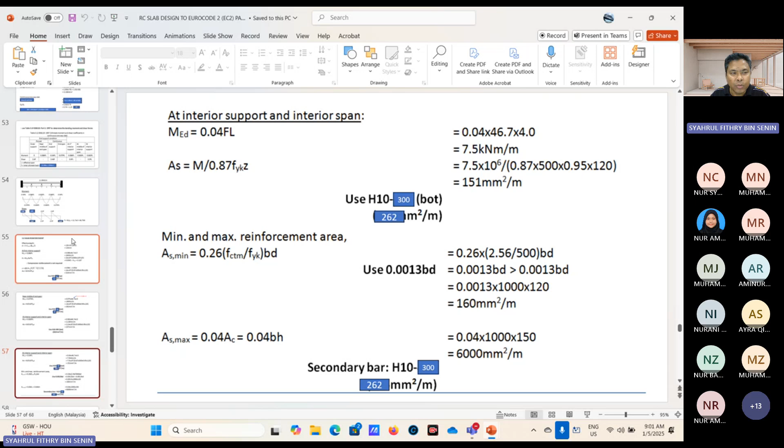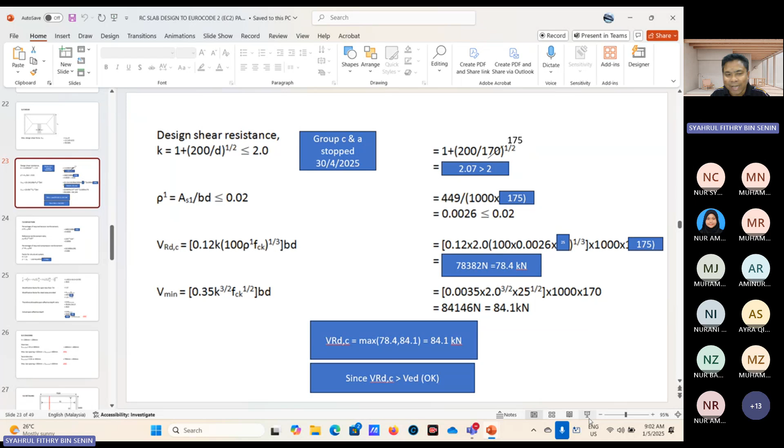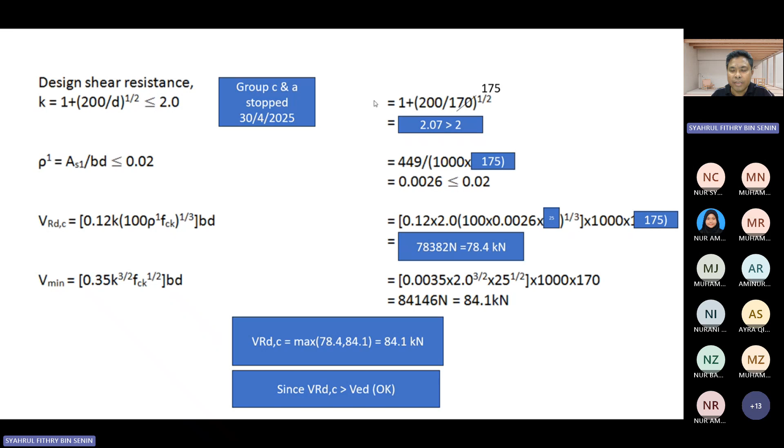Now, before we do our tutorial, we finish our lecture regarding the shear resistance check. We have done this shear resistance check in your classroom yesterday. Now we move on to another two checks, that should be done on the previous example yesterday, which is the deflection check. On the deflection check, you must compare your rho and your rho naught.

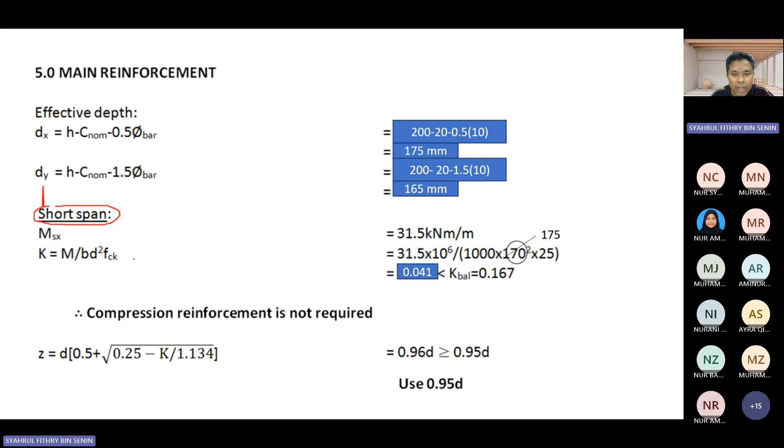So your rho is equal to the required area - and this area required is for what? Is for the maximum sagging moment. So you have to refer back to the section where you design sagging reinforcement. If we refer back to the sagging reinforcement, which is the short span, remember that short span has the highest bending moment.

So the required area for this part is 436. Kita lihat balik apa dia punya deflection. AS required here is 436. Okay, so di sini saya ada kesilapan, should be this one is also 436. So please change this one to be 436. Kenapa 436? Because required, not provided. So this answer also will be changed.

If I calculate that again, the correct answer will be - times 175, you'll get 0.0. So this one will be 0.00, we have double 0025. So almost similar, because the previous answer is 26, but this one is 25.

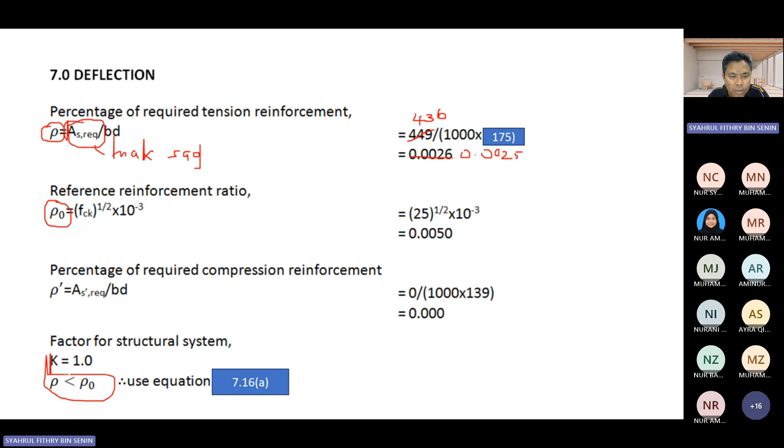So you found that your rho is less than rho naught. So you need to use equation 7.16a. And remember that our system here is - sekejap ya - so our system here is simply supported 2 slabs. Okay, simply supported 2 slab.

And from table 7.4n, kalau tak silap saya, K is equal to 1. You have to substitute to equation 7.16a, masukkan nilai yang sepatutnya, then you get L over D to be 38.8. And since your span is less than 7 meter, your MF1 is equal to 1. Because your span - how much is your span?

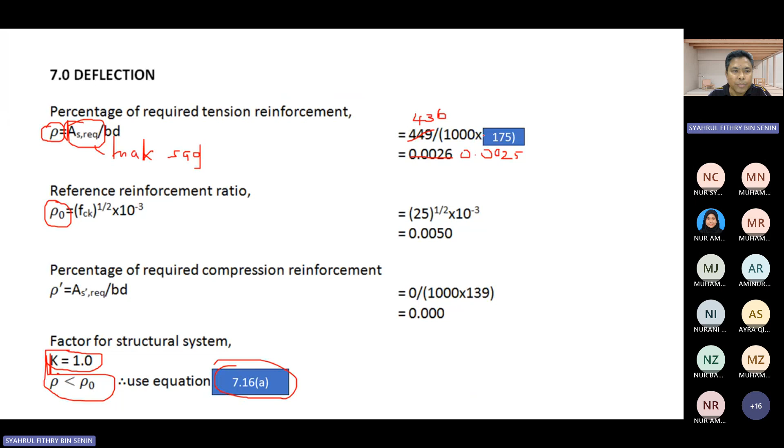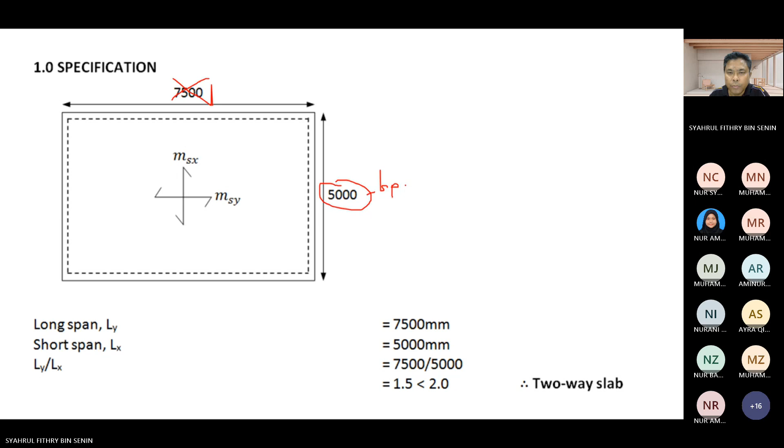Kalau kita rujuk balik soalan ni, kita kena ambil yang shorter span. Shorter span, where is it? 5,000. Bukan 7,500, bukan eh? This is your span, which is 5 meter ataupun 5,000 millimeter. So you have to compare with 7 meter. Kita punya span ni adalah 5 meter, which is less than 7. So that's why MF1 is equal to 1.

And MF2, so this is your MF2.

You have to compute the ratio of provided with the required, and find which one is the lesser value. So the lesser value will be 1. And another one is MF3. MF3 for slab is always equal to 1, because slab does not have any flange.

So you multiply your L over D that you calculated earlier with MF1, MF2, and MF3. You get 38.8. Your actual L over D, remember your span is 5,000 divided by your D, gives you 28.6. This 28.6 is less than L over D allowable. Therefore, your deflection is okay.

That is the second last check. After that is the cracking check, the final check. You have to check your main bar and your distribution bar. For your main bar, the maximum spacing is the minimum between 3H and 400. If you calculate the minimum between 600 and 400, it is 400. So the maximum spacing for main reinforcement is 400.

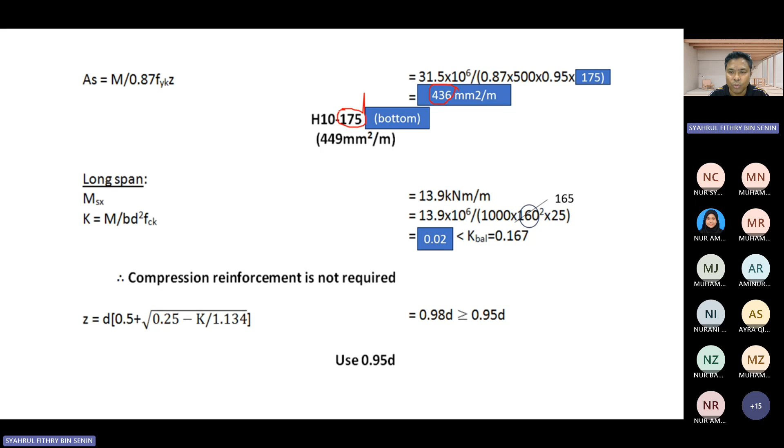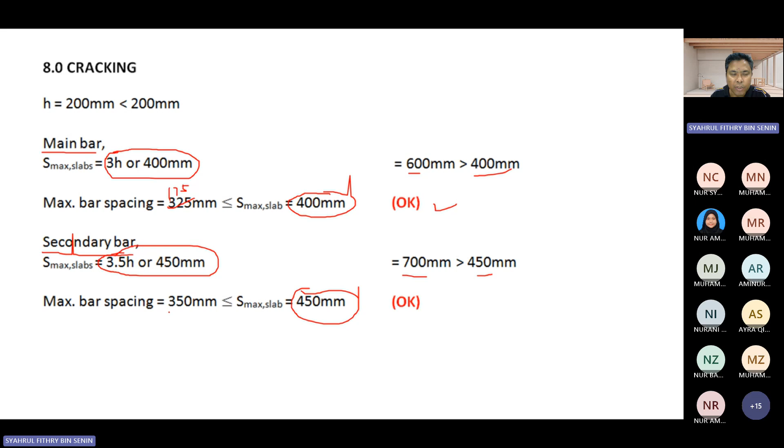For your distribution bar, the maximum spacing is the minimum between 3.5H or 450. The smallest value between 700 and 450 is 450. Let's check your secondary bar reinforcement spacing for the long span.

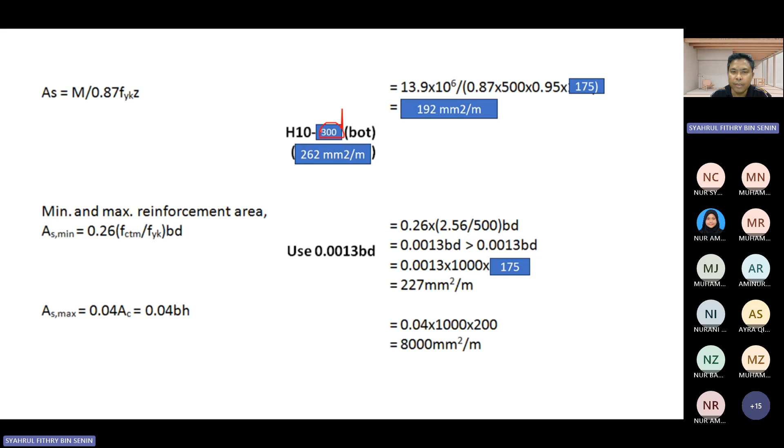This is the long span. So the reinforcement spacing is 300. Let's replace it here - this is 300, not 350. Please correct your notes. Since 300 is less than 450, the crack check for distribution bar is okay.

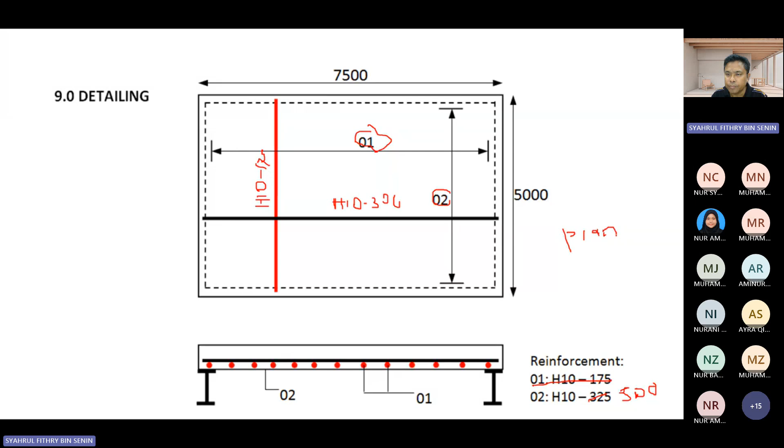This is the plan view, and the one below is the sectional view. If you look from here, let's say this is section XX. This is section XX below. Section X.

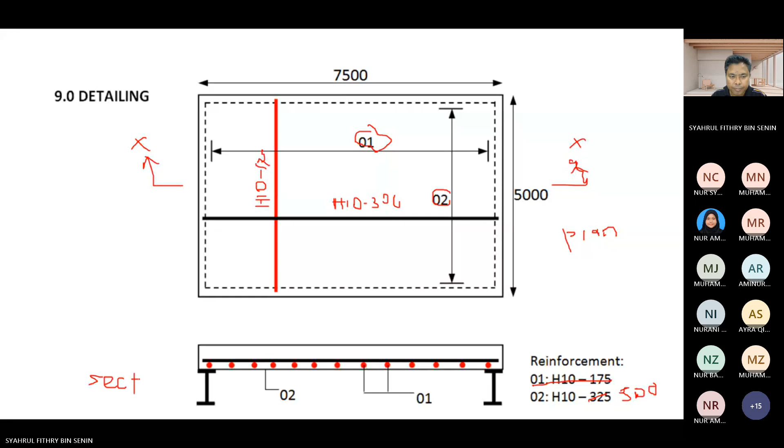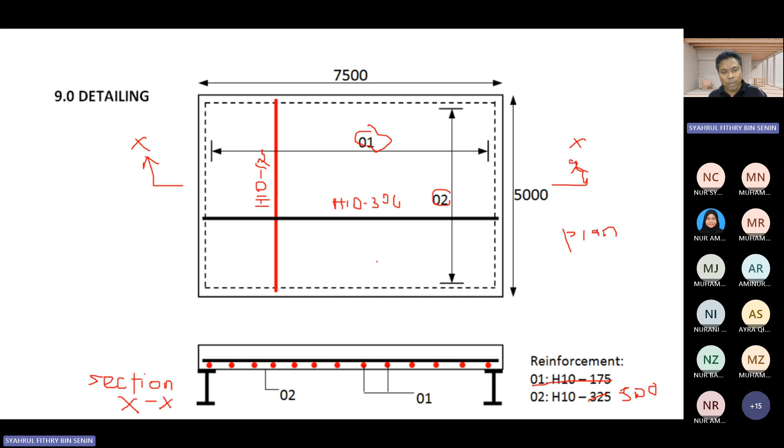So that's the amendment you should make on your lecture notes. After we finish the lecture notes, we can do our tutorial session. So far, any questions?

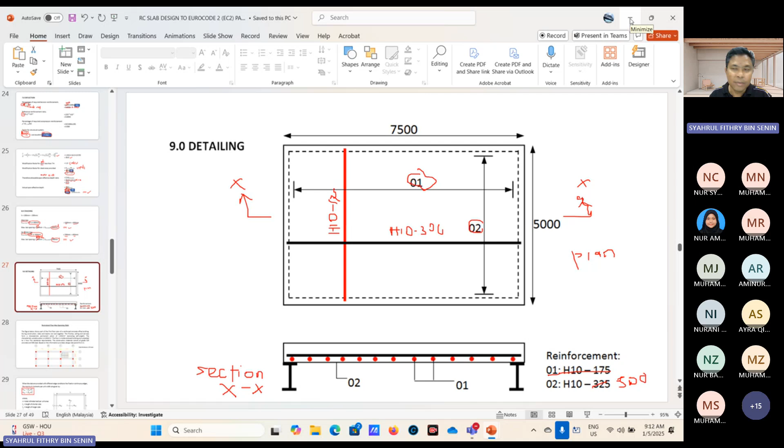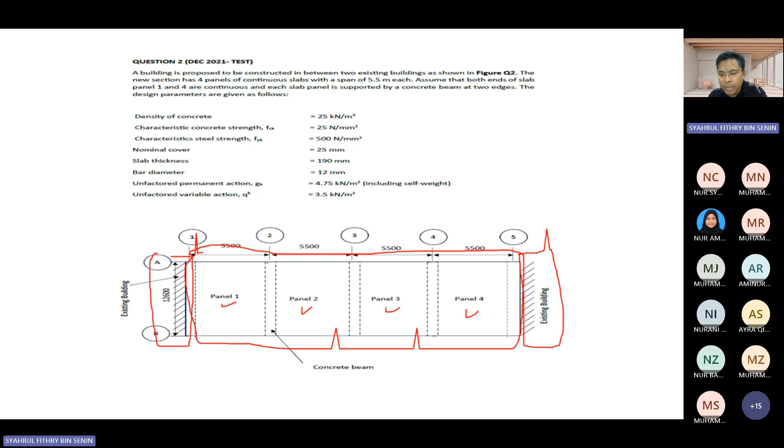Now, if you look here, each panel has a beam - this is a beam, this is also a beam. The beam is below, it's located underneath. There's a beam. So you have 4 panel slabs, and each panel slab is continuous.

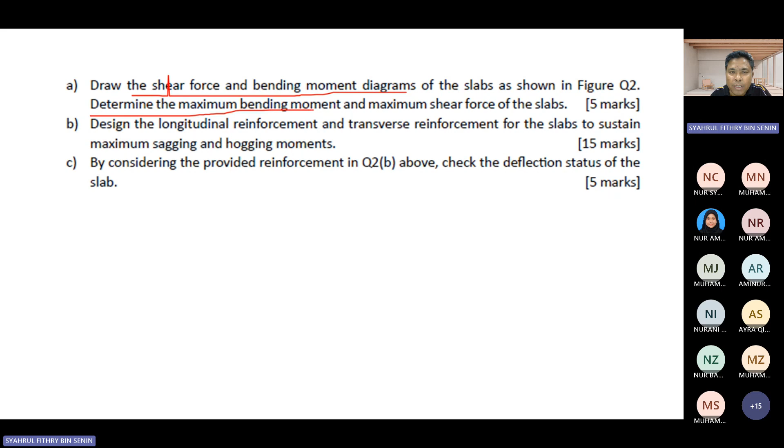Draw the bending moment and the shear force diagram. Itu perkara pertama. Perkara kedua, determine what is the maximum bending moment and maximum shear force of the slab. Soalan kedua, design the longitudinal reinforcement as well as the transverse reinforcement for the slab to sustain maximum sagging and maximum hogging moments. Dan yang ketiga adalah by considering the provided reinforcement in question 2B, check the deflection status of the slab. So 3 soalan saja.

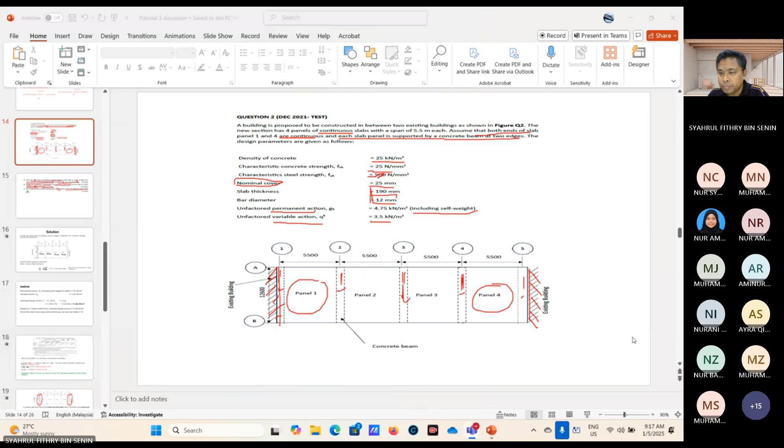So apa yang kita kena buat untuk jawab soalan pertama ni, soalan A ni. Mula-mula sekali apa yang saya buat adalah kita, saya lukiskan dulu the plan view. Okay, this is the plan view given to you of the slab. You have 4 panels. So first thing you have to do is to check the slab category, whether the slab is one way ataupun two way.

Saya akan check setiap satu panel tu, sebab kita ada 4 panel. Panel 1, panel kedua, third panel and fourth panel. So each of the panel kita kena semak kategori dia one way atau two way. And you know that for each panel, the longest panel is 12.6 meter. Ini adalah LY you.

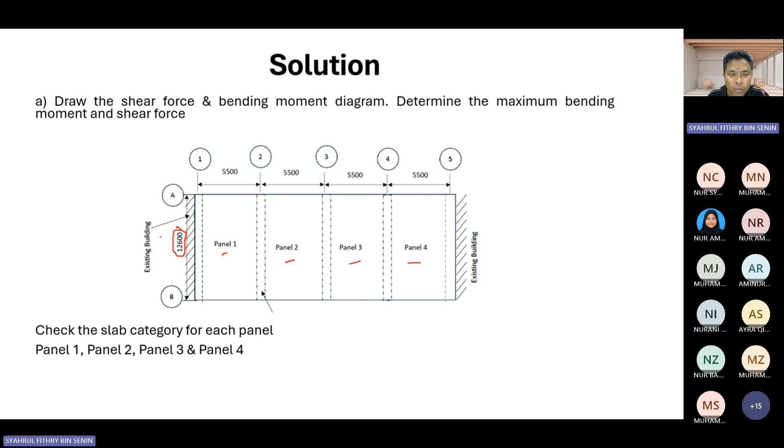And for each panel, LX is 5.5. This is your LX, 5.5 meter. Dan kalau tengok pun panel kedua, 3 ke 4 pun LY and LX also the same. So kita boleh kira sekali saja, check LY over LX, you find it is more than 2. Therefore slab panel 1, panel 2, panel 3, panel 4 is a one-way slab.

Nah, nampak tu saya letak terus direction of the load on the slab. Nampak tak ada simbol tu yang saya buat anak panah tu? Itu simbol arah one way and how the load is distributed from left to right. And you know that also our slab has more than one span, so therefore the slab is continuous.

So maksudnya ini adalah two-way slabs continuous type. Mula-mula sekali kita kena categorize dia jenis one way ke two-way, and then adakah dia simply supported ke, adakah dia continuous. So saya dah tahu kat sini, dia adalah two-way dan juga continuous. Bila you dah tahu two-way and continuous, then you can refer to the relevant Eurocode page to get the bending moment. So before we get the bending moment, we have to find the loadings.

Ingat dalam soalan tadi, dia dah beritahu your GK sudah termasuk slab weight, so saya tak perlu kira slab weight di atas. Kalau tengok example dalam nota, saya kira slab weight sebab dia beritahu excluding slab weight dalam contoh tu. Tapi untuk test ni, dia including, so saya cuma letak nilai yang diberi.

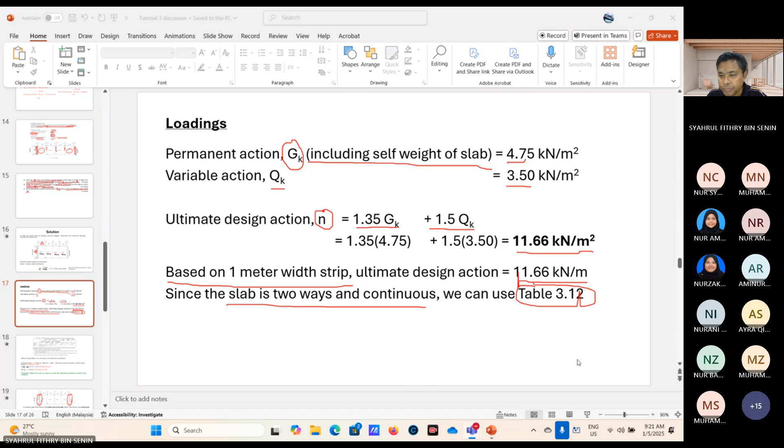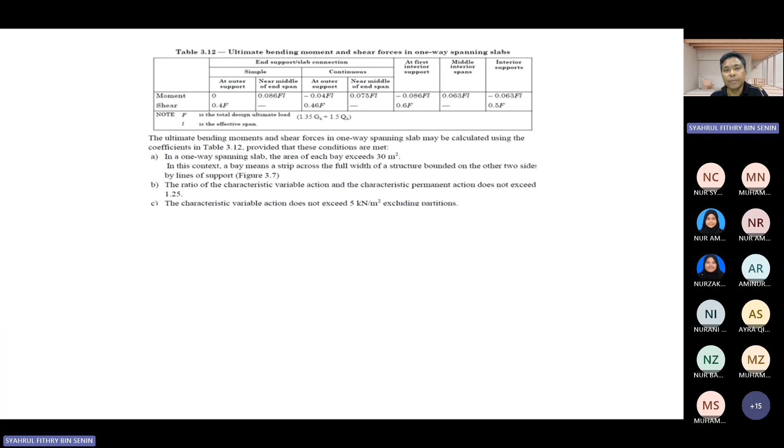Okay, so from table 3.12, this is table 3.12. Before you use this table, you have to prove that it can be used by satisfying 3 conditions. Ada 3 condition kat sini, you have to ensure that these 3 conditions are met. So kita akan check satu persatu.

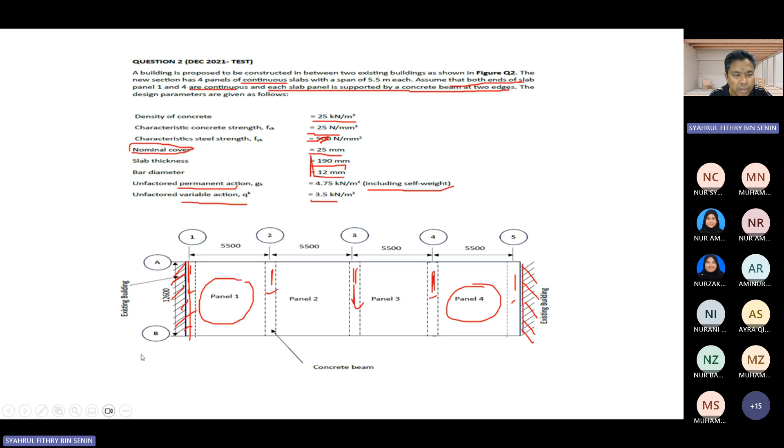So kalau tengok area for bay 1 ni apa dia? Kalau kita tengok gambar kita yang awal ni, saya nak padam ni semuanya, saya discard. What is bay 1? This is that we call as bay. Inilah bay 1, this is your bay number 2, this is the third bay, and this is your fourth bay.

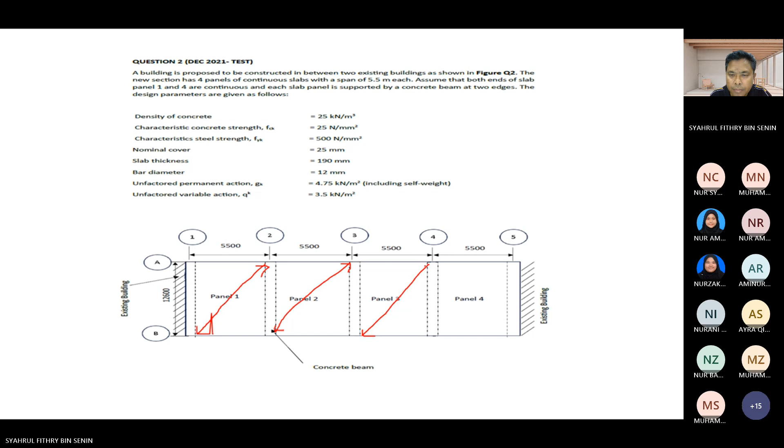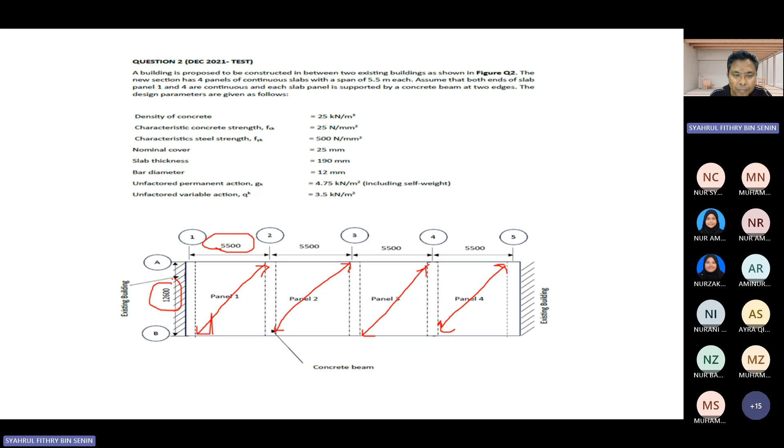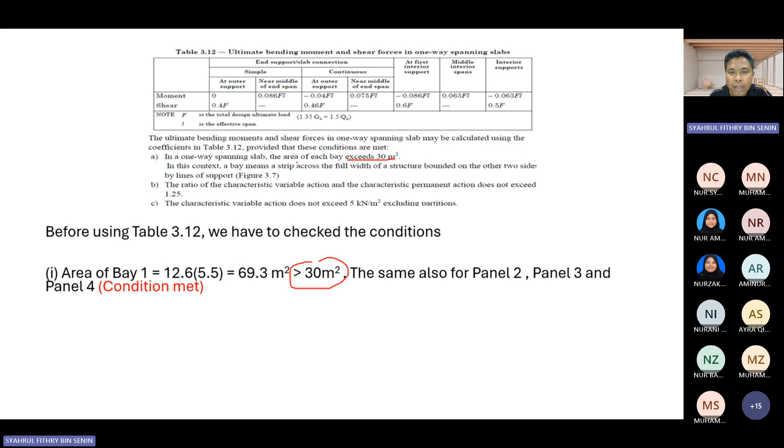So kalau tengok setiap satu bay tu, areanya adalah 5.5 meter darab 12.6 meter. So maksudnya, area for bay 1 until bay 4 is exceeding 30, seperti yang dia minta ni, exceed 30. Area of each bay, kita ada 4 bay dan keempat-empatnya memang lebih besar 30. So first condition is met.

Okay, now we check for second condition. The ratio of QK to GK tak boleh lebih daripada 1.25, and you find that it is less than 1.25, so second condition also met. And the third one, QK cannot exceed 5, kalau tengok pun memang less than 5, so third condition also met.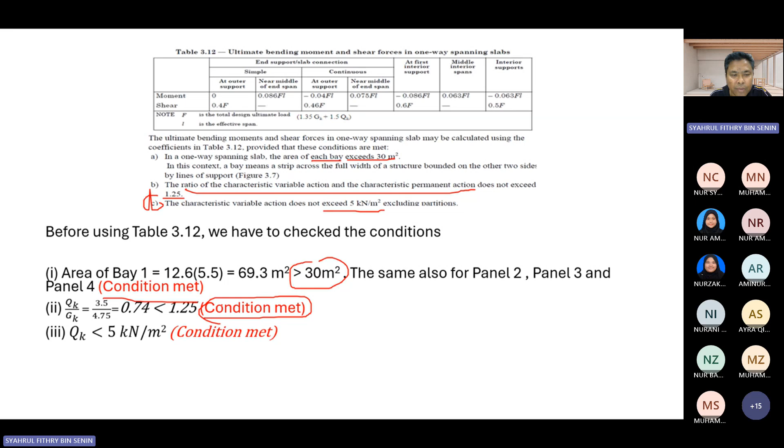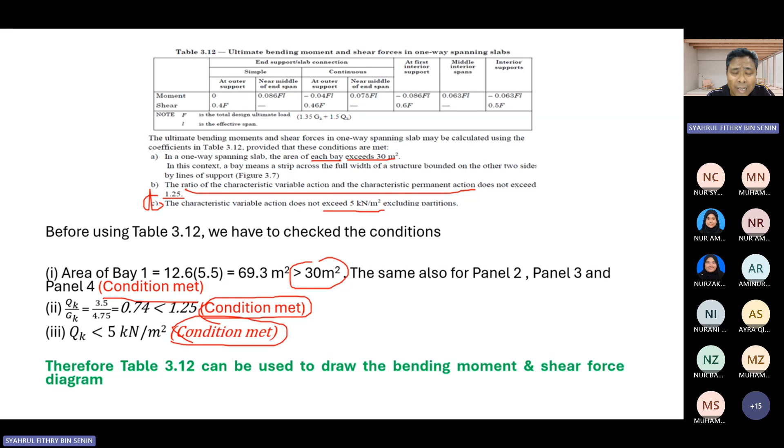So conclusion kita apa kat sini? Maksudnya table 3.12 can be used to draw the bending moment and shear force diagram. Baru kita boleh gunakan table 3.12 ni untuk draw the bending moment and shear force diagram, sebab kehendak soalan suruh lukiskan bending moment and shear force.

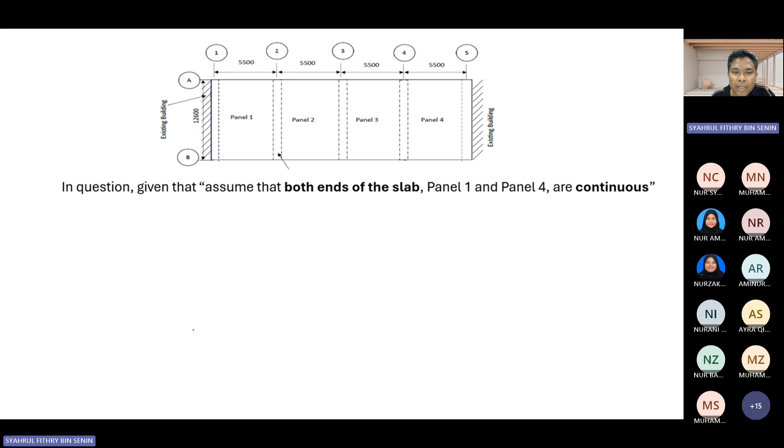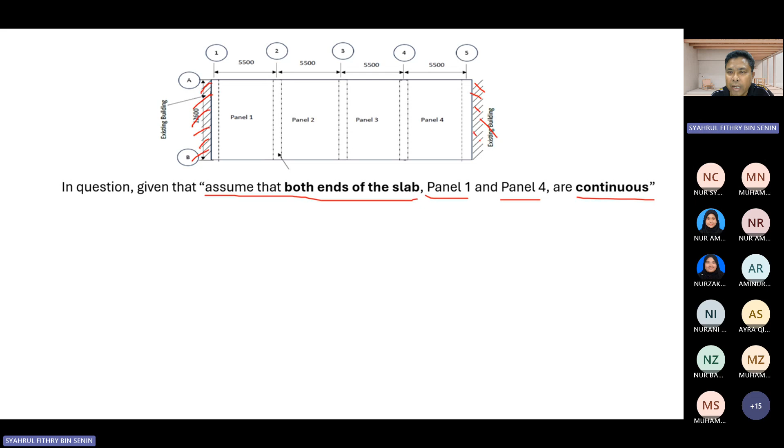Okay, so this is the building given to you, the plan view. Dan remember that dalam soalan dia dah beritahu assume that both ends of slab, iaitu panel 1 and panel 4, are continuous. Maksudnya tempat yang hujung ni adalah fix. Dia fix, dan kalau saya lukis dia punya free body diagram, you akan dapat seperti ini. Fix dan fix, di mana setiap satu slab punya panel length adalah 5.5 meter.

And it is under loading of 11.66 kN/m. Ini adalah free body diagram, this is the free body diagram of the slab.

And then after that, barulah kita boleh lukis kita punya bending moment and shear force. Okay, so that is the values that I get from table 3.12. Dan after that, saya akan letak semua nilai F. Dan ingat F ini apa? F adalah you darabkan 1.35 Gk and 1.5 Qk, darab lagi dengan L. So F you adalah 58.3 kilonewton.

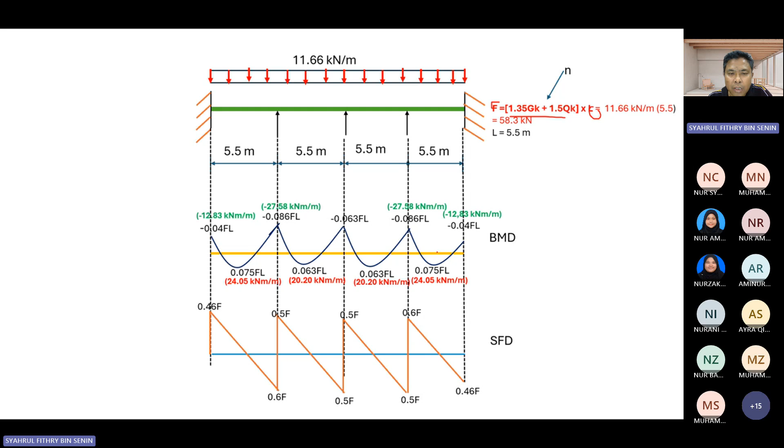Dan saya letak setiap satu nilai ini, nampak saya kira dan saya letak setiap satu nilai bending moment itu. Itu adalah 24.05 kilonewton meter for 1 meter width. Yang di tengah itu pula 20.20. Warna merah itu adalah sagging bending moment, dan yang warna hijau itu adalah hogging bending moment. So hogging bending moment yang pertama warna hijau itulah 12.83 kN meter for 1 meter width. Dan ada lagi dua lagi hogging moment, 27.58 dan ada satu lagi 20 kN meter.

And the same thing also goes to your shear force diagram. Letakkan nilai-nilainya 26.82, 34.98 kN and 29.15 kN. So by drawing this, you answered already question A.

Okay, ada soalan tak setakat ni? Tak ada, sir.

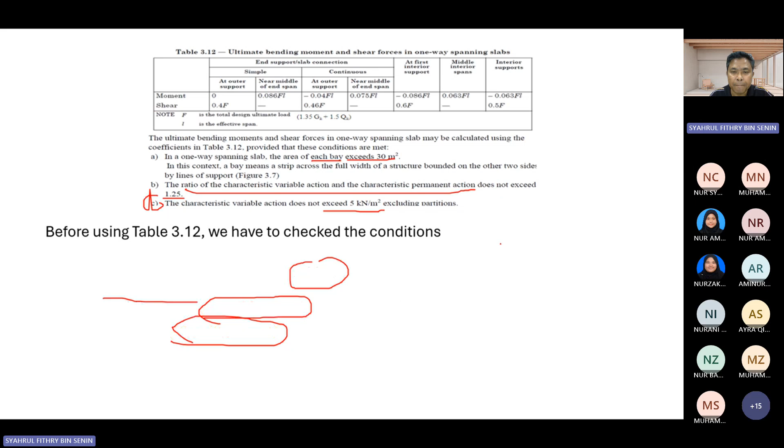So ini adalah soalan nombor 1. Anda boleh tengok berapa panjang dia punya jawapan ni, cuma untuk 4 markah. 4 markah, saya pun tak ingat berapa markah tadi. Cuba tengok, 5 markah. Okay, so that's how to answer part A.

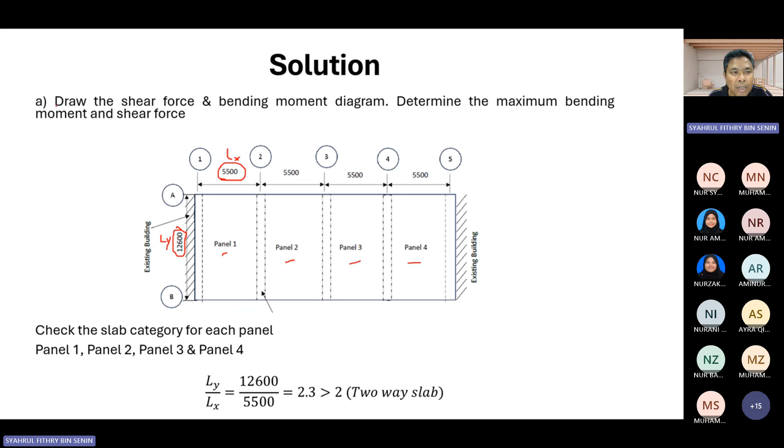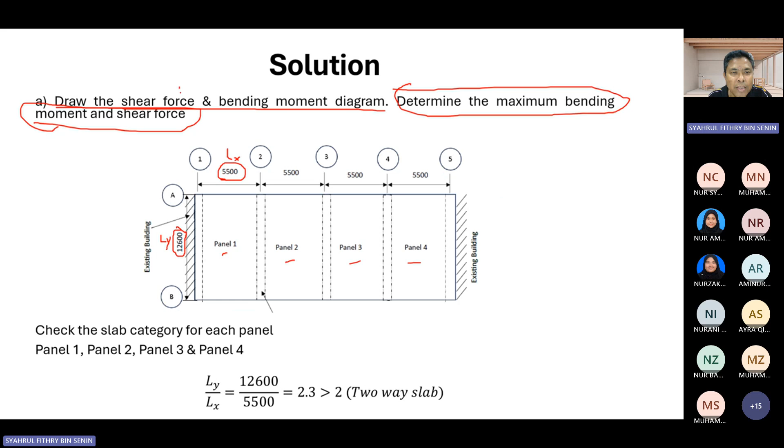To draw the shear force and bending moment diagram. Tapi saya tak buat satu lagi ni, yang ini kita dah buat. Ada satu lagi benda yang saya lupa nak buat: determine the maximum bending moment and shear force. Yang ini saya tak buat lagi, saya baru buat yang atas saja. So saya kena pergi balik pada gambar bending moment saya dengan shear force. Rupanya belum habis lagi.

Okey, yang ini tadi kita dah tulis bending moment values dengan shear force. So now kita kena tengok maximum bending moment. You boleh nampak sini, maximum bending moment.

Ingat bending moment kita ni ada dua jenis. One is the hogging moment, yang mana? Semua ni adalah hogging moment. Sorry, yang merah adalah sagging moment. So from this 4 sagging moment, yang paling besar sekali adalah 24.05.

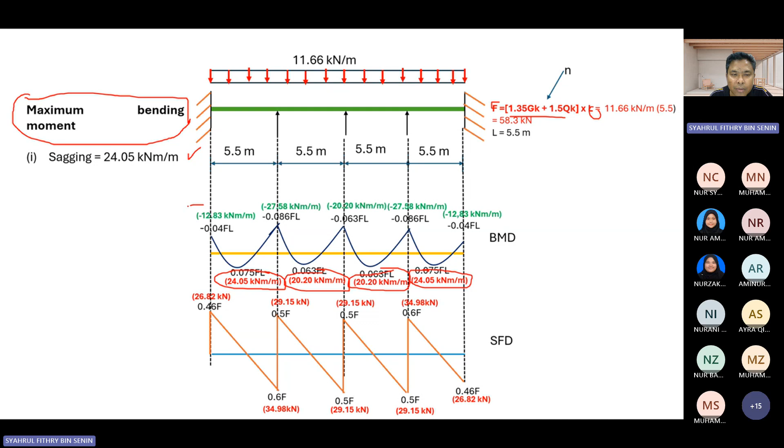Okay, dan untuk satu lagi yang dinamakan sebagai hogging moment, yang warna hijau ni, kita ada 5 value warna hijau ni. Dan nilai yang paling besar sekali adalah 27.58.

Okay, and for shear force diagram, kita cuma tengok satu value saja yang paling besar sekali. Yang mana? Yang paling besar sekali inilah. So you punya maximum shear force adalah 34.98. Dan you baru dapat 5 markah.

Okey, boleh tak? Ada soalan? Tak ada, tak ada. Letih you all ni. Saya masa cuti ni lah patut segar. Belum mandi ke apa? Letih dia.

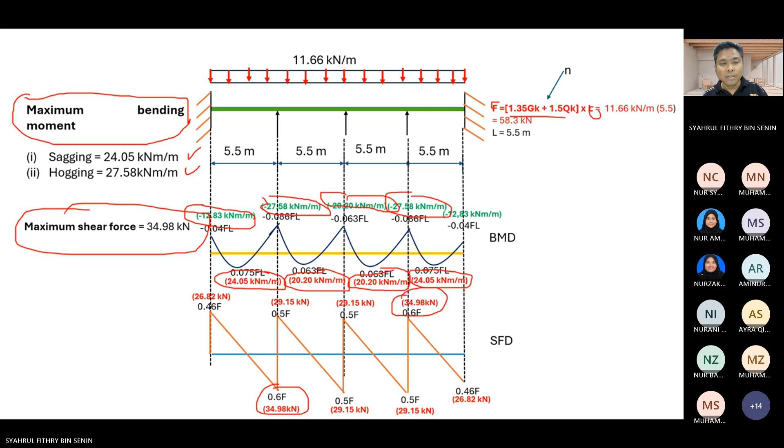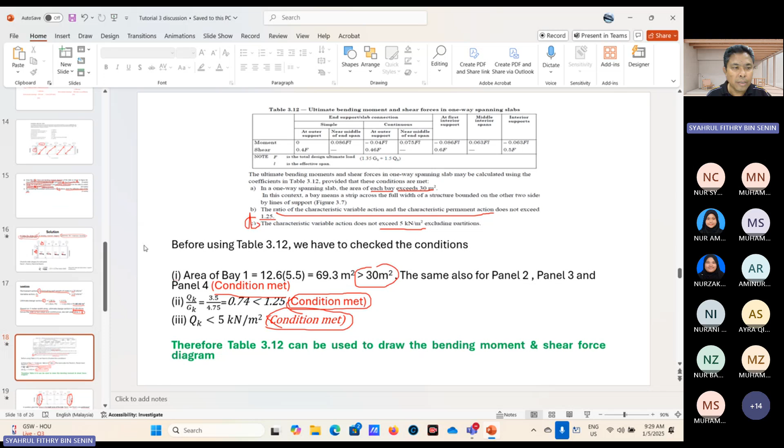Okey, so soalan kedua apa dia? Kita tengok apa soalan kedua. Saya kena patah balik sebab nak tengok soalan. So tak apa, kita keluar ni. Kita tengok soalan dia, soalan kedua apa dia?

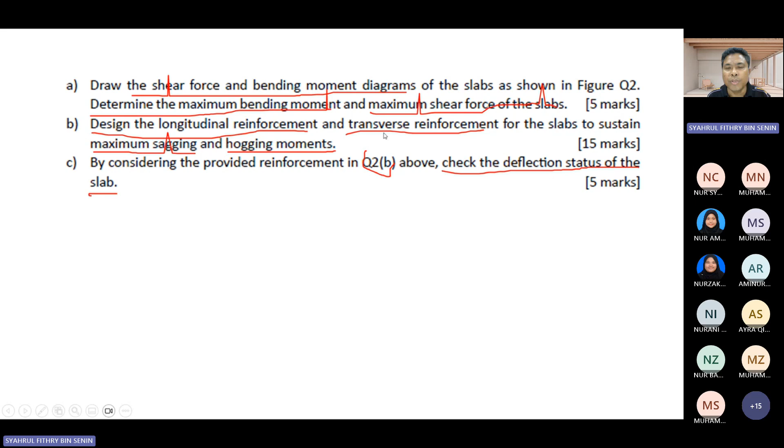Ni soalan kedua. Design the longitudinal reinforcement ataupun design the tensile reinforcement, benda yang sama lah. And transverse reinforcement, maksudnya you punya distribution bar. Transverse ni maksudnya distribution bar ataupun secondary reinforcement to sustain maximum sagging.

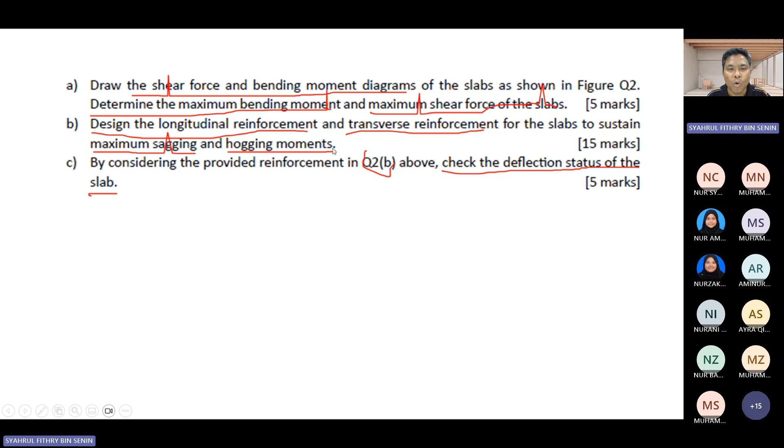Ingat tadi kita ada maximum sagging and maximum hogging. So tadi kita dah senaraikan maximum sagging dan hogging. Jadi kita akan design mengikut sagging and hogging. So ini yang kita nak buat dekat sini: design for maximum sagging reinforcement. Maximum sagging, and you know that maximum sagging adalah 24.05.

Okay, mana saya dapat ni? Kalian perasan tadi, ni sagging, 24.05. Okay, so kalau kita pergi kepada soalan tadi.

So 24.05, and calculate your effective depth. Your concrete thickness 190, nominal cover dah diberi 25, main bar sudah diberi 12, so you akan dapat 159.

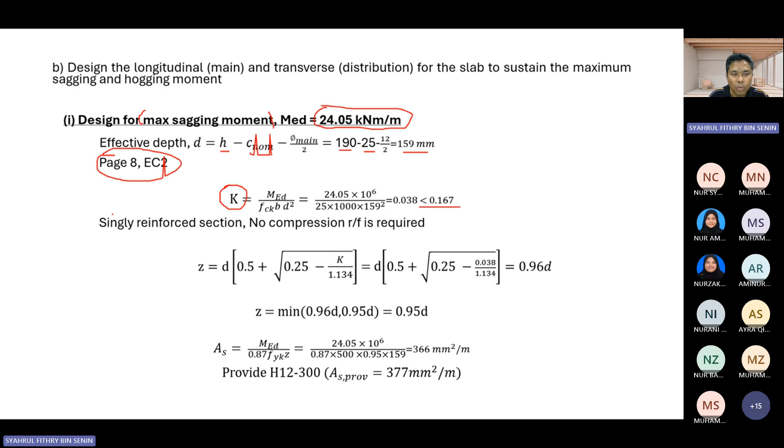So from page 8 EC2, calculate your K, and in slab nilai ini memang sentiasa kurang daripada 0.167. So tolong tulis conclusion ni: single reinforced section, no compression reinforcement is required.

Calculate your Z, and Z you dapat 0.96D. Compare 0.96D yang you dapat ini dengan 0.95. The lower value between this will be your Z. And then after that, calculate your As of reinforcement.

You dapat nilainya 366. So based on the table dekat Eurocode kat belakang sekali, based on diameter 12, saya perlu spacing 300, supaya area provided lah 377. So that is for sagging reinforcement.

Do similarly also for hogging. Maximum hogging, okay, 27.58, repeat the same procedure. Calculate K, calculate Z, calculate As. So dapati you perlukan H12 250 untuk support area 419. You akan pakai 452, okay.

Dan ingat ya, untuk slab sentiasa akan dapat kurang daripada 0.167, which is single reinforced section, no compression reinforcement is required. So step dia sama tadi macam sagging, cuma bending moment saja berbeza.

Dan ingat B sentiasa 1000. Nampak ni? B sentiasa 1000. Sama juga untuk sagging, B also 1000. Jangan lupa yang tu. Okay, jangan lupa juga lepas nak kira, check maximum minimum area and maximum area of reinforcement.

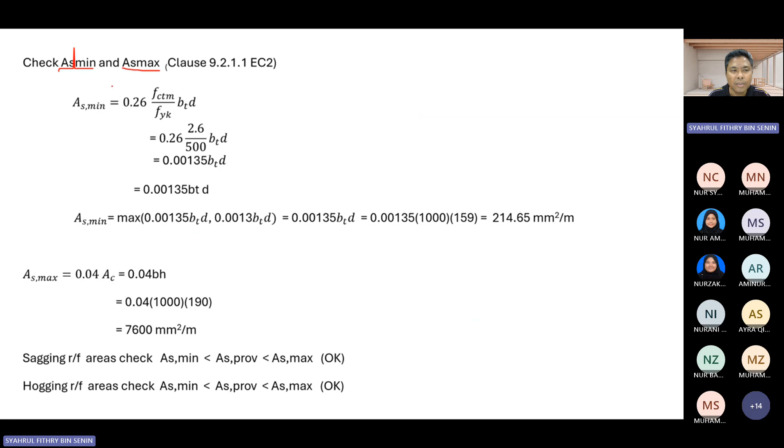So harapnya you dah ingat formula ini. And then for FCK 25, FCTM adalah 2.6. So if you calculate, As min adalah 0.00135 BTD.

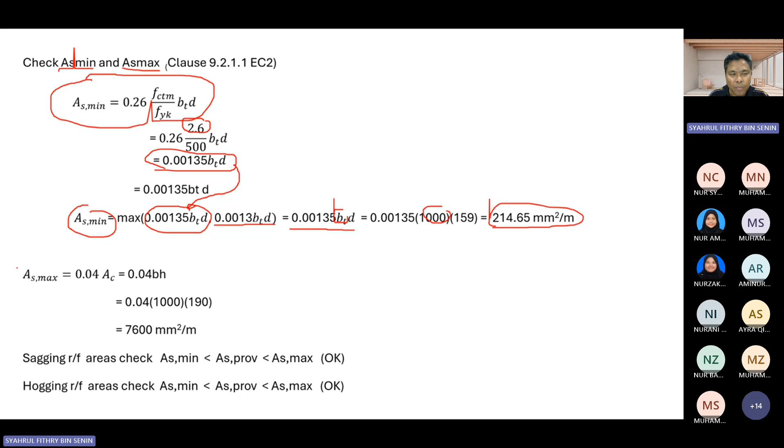So As minimum you kena compare nilai ini dengan nilai ini yang standard. Ambil yang paling besar antara dua ni, sudah tentu ini yang besar. So that's why As min akan ini dan BT sentiasa 1000. So area minimum adalah 214, whereas your maximum area adalah 7600. Dan ingat H ni bukannya D, H adalah 190.

So kalau kita tengok tadi, area minimum 214, maksimum 7600. Cuba kita semak untuk sagging. Kat mana sagging? So adakah 377 ni lebih besar daripada 214? Ya. Adakah 377 ni kurang daripada 7600? Ya. So maksudnya sagging reinforcement okey.